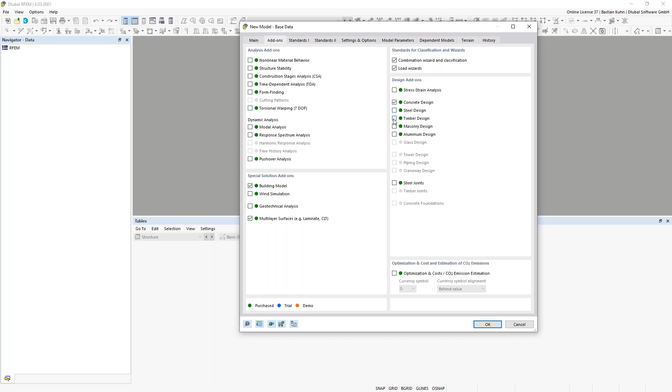For this, I will define a new model with the add-ons we will need today: the building model and the multi-layer surface. We will have a hybrid building made from concrete and timber, so I'm also activating concrete and timber design. Paul will do the design process afterwards, so this is just for completeness, or we can actually stay with that. We have the standards available here for concrete and timber, and also the combination for this.

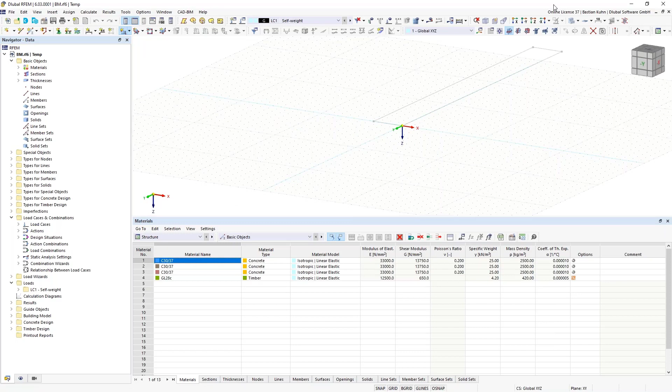First I will define the ceiling made from concrete, from the building that you just saw in the presentation from Andreas. I will not define thickness, materials, and cross sections in detail, as there are other webinars dealing with this. First I'm using a surface 30 centimeters thick with C30/37 concrete material, in the XY area with the dimension of 9 by 20 meters.

Then for my pillars, or the columns in the structure, I will divide the line here for arranging them by 2, and copy this for the other columns in the X direction 4 times by 4 meters. That was wrong, sorry - I had to press the control button, otherwise it will not work. I'll repeat this step, and now it looks better.

I will do the stiffening of the structure with a so-called concrete kernel, arranged from these nodes highlighted here, so I will delete the two nodes in the front. The first story should have a height of 3 meters.

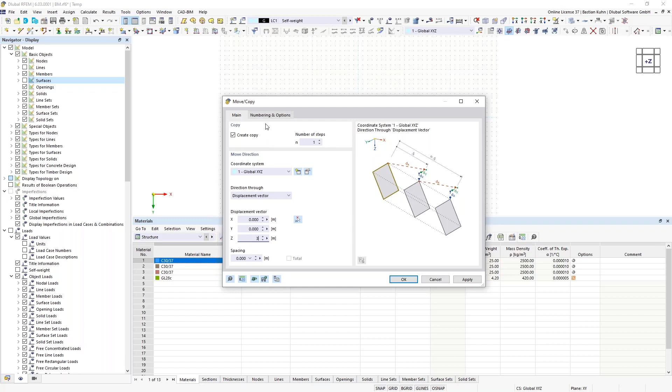I'm defining this 3 meters here, and I will switch off the surface and lines from displaying, and copy those existing nodes once, also 3 meters, but automatically arrange the columns in between. Therefore I'm activating step links here and defining the cross section.

The section will have the dimension 40 by 40 centimeters and the same material as the first floor ceiling, but it's a new material - oh, I forgot the reinforcement, sorry, happened to me twice now. So I go into the material database, and now I'm choosing reinforcing steel.

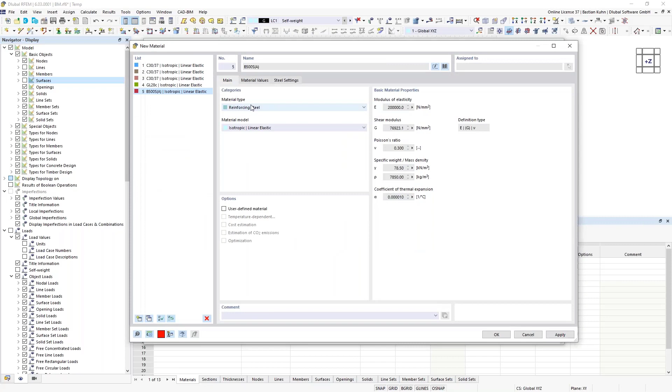Again, that's only for the design process, so not so essential now for the things that I want to show you in the first point, but it's important for the points that Paul will show you.

Okay, now I can put the members and surfaces back again. In this area, that's what I told you, where I want to have the concrete kernel. I'm arranging this, and it should have the same thickness as the ceiling, but with a new material, so I have 3 materials already consisting of the same grade. It just makes life a little bit easier afterwards. So here is the concrete kernel, and that's actually how the majority of the stories should look like.

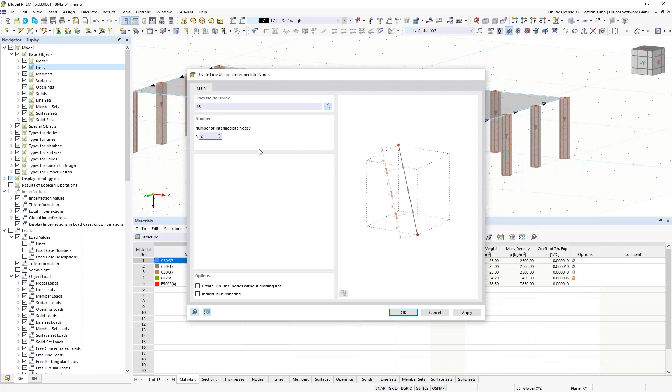I want to have an opening at this point, therefore I'm dividing this line by 2 intermediate nodes, giving the first one an X coordinate of 9 meters and the second one an X coordinate of 11 meters, so I have quite a wide opening of 2 meters, which should be enough.

That I will also copy by an amount of minus 2.5 meters, and I will not copy anything inside that, so just a node, and define the opening in here. All right, okay, so now that's done.

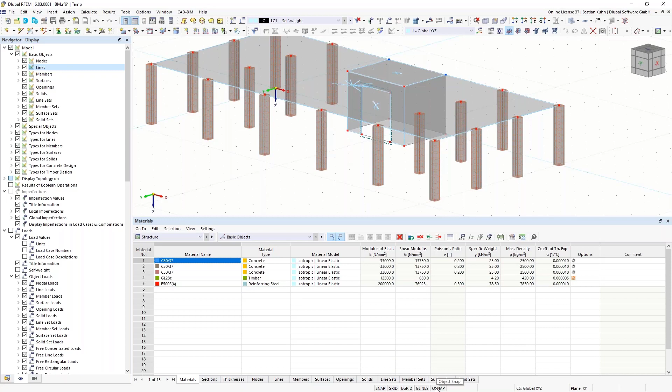You probably saw that some kind of cells are generated here. That is something already needed for the building model add-on afterwards. In order to arrange the cells correctly on the opening, I need to divide this surface. Let me check the number - the surface number 5 - by vertical lines completely.

And now I could copy the node, of course, just 50 centimeters above, but there's an easier function to use - the object snap with perpendicular inside here. Once I activate that, it's generating the line perpendicular to the existing one, and that fits, so it just goes a little bit quicker.

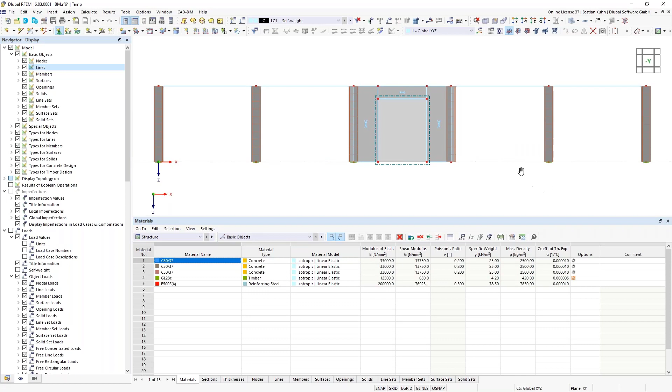All right, so we need supports - that's what is missing right now. The bottom columns are from concrete, and therefore I can also clamp the supports. Okay, we can arrange it maybe this way and this way, whatever. So we need to delete those - those are not sensible in here. Maybe they are a little bit small, so I can use the slider to increase the size a little bit.

And now in the concrete kernel, I will also define line supports for the walls. They will be arranged locally with a fixed movement in X and Z direction, so they can only bear force in the horizontal direction of the wall and in the vertical direction of the wall.

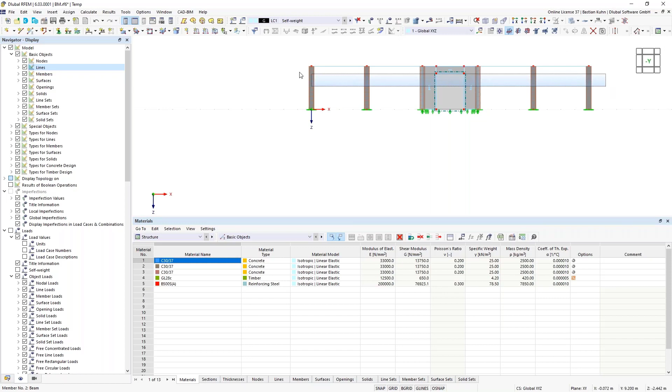Okay, so that is the first story, and it's good to go, I'd say. And then we will copy this one 4 times, again 4 times, by an amount of minus 3 meters. Then the building is already there.

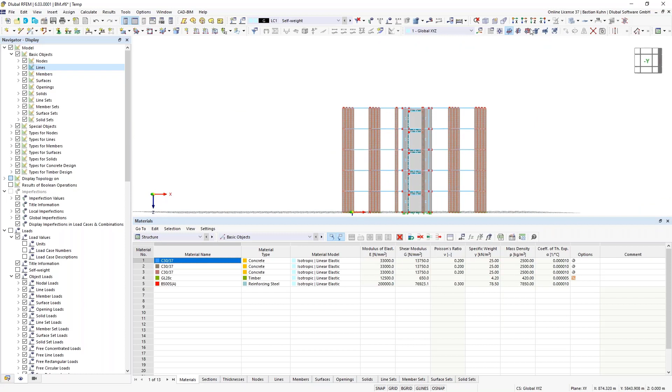But we miss one story. And I want to show you that with this add-on, we are able to calculate also unsymmetric ground floor plans. So therefore, I'm defining the top story with a slightly different height. Let's say we want to be very economic, and therefore we just say the top 2 stories should have a height of 2.75 meters, which will be round about this, but minus makes more sense. So, all right, okay, so yeah, it's quite narrow here, but it's still enough, I would say.

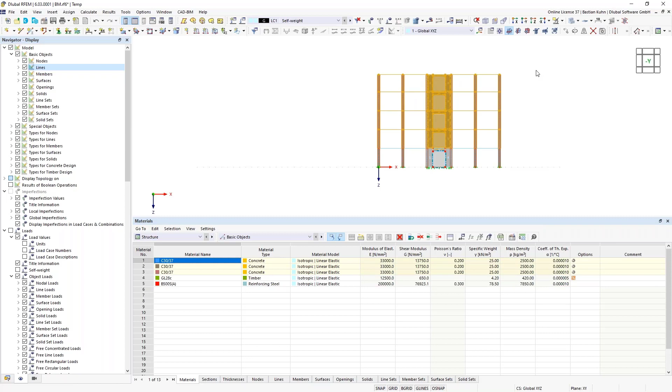I also said that we want a hybrid building, therefore the columns in the other stories should be made from timber, except those 2 ones in the back.

So we will change them now by members, edit, and give them a new section here - a section of 22 centimeters by 22 centimeters. And of course, oops, that was wrong, sorry - a timber material. Therefore, we go into the material database.

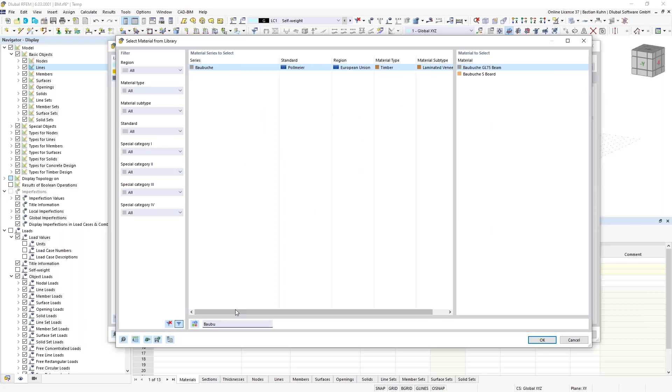Now you have that there. And I'm choosing a quite interesting product called Baubuche, which is perfect for designing columns in higher buildings, as it is light, but can keep the same or nearly the same amount of pressure that concrete can bear. So that's something perfect to be used for high-rise buildings together with timber.

Okay, the design types, configurations, and so on, that will be shown to you by Paul for the concrete, and it's the same for concrete, steel, and timber anyway, so we do not have to go too much into detail. The only thing I can say now is that for the design types, we are assigning a service class 1 for the columns, as they are covered, or they are all inside the building. That's why we are using it this way.

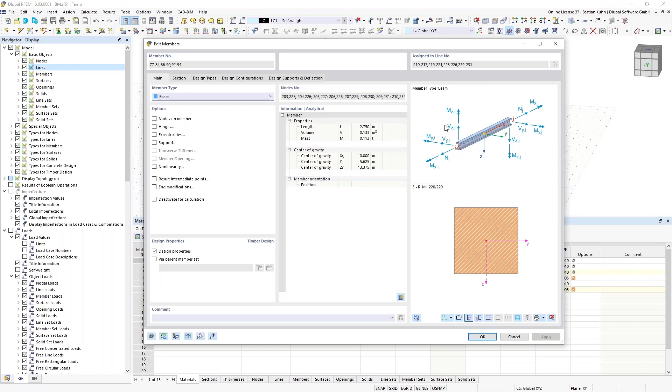Okay, this, and then these columns here, they should have hinges. I'm explaining afterwards why I only assign hinges in those stories, after I have assigned or defined the building model data of it. All right, so that's UX, and we do the same for top and bottom.

All right, so that's here. We also want the top floor to be a little bit different. Therefore, we will delete this and now define cross-laminated timber for the top two stories of the structure. We define a new thickness.

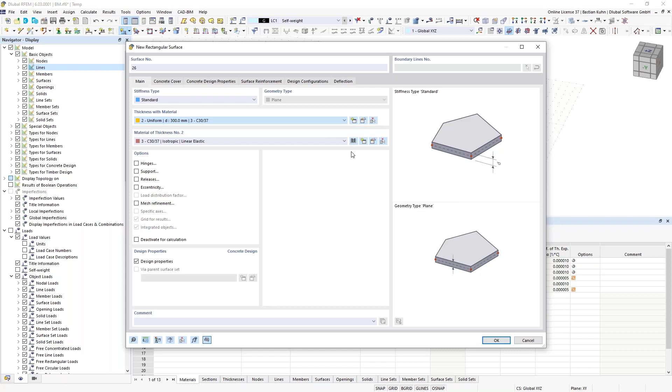As I had activated the multi-layer add-on, the thickness type layers is available here. There's another webinar dealing with this, probably Andreas will show that to you afterwards. Just as basic information, you can define several layers of material here.

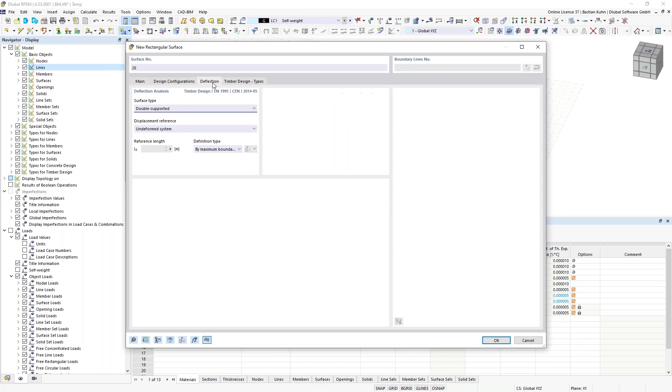To keep it simple, I'm just choosing a material from the database, but user-defined definition is also possible. There are factors you can see here that are also explained in these other points. That's the same as what I already showed for the beams.

So then where do we want to have our surface in here? From this column here to this, and also from this to this. All right, and we do the same in here. On the other side, we could have also mirrored it, then it would have been even quicker for modeling it.

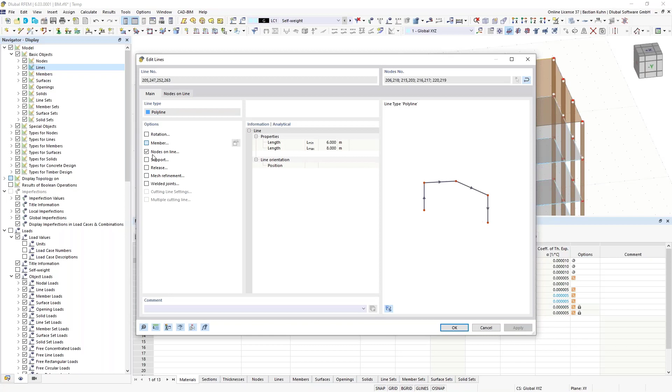Now we have quite a bigger overhang here, and we have also no stiffness in here. What do we do there? Well, for sure, we will need some beam there. That's going to be a new member, and also a new section.

We will choose the section 18 centimeters by 22 made from glulam. All right, member, and then we have it in here. There's something that has not been divided correctly. I will do so now. Yeah, looks good.

Okay, there was something that looks strange to me. So I forgot to assign there also the moment hinges. I can add that quickly by just selecting here the hinges and choose the same ones as for the columns. And for sure, those have to be eccentric.

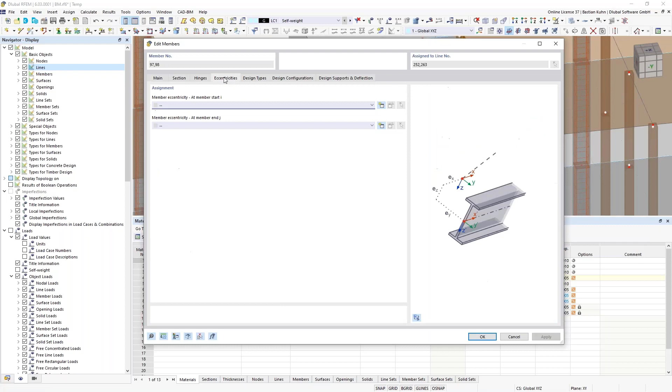That can also be added here. So eccentricity, and we will have it underneath with an offset to the existing surface, and it's going to be this one. All right, oh that was too quick. We need it also on both sides of the member. Okay, that looks good.

Now, when you have a downstand beam under a ceiling, and also here the CLT plate should be connected with some kind of slip or degree of freedom, as a moment stiff rotation is not possible for timber in here.

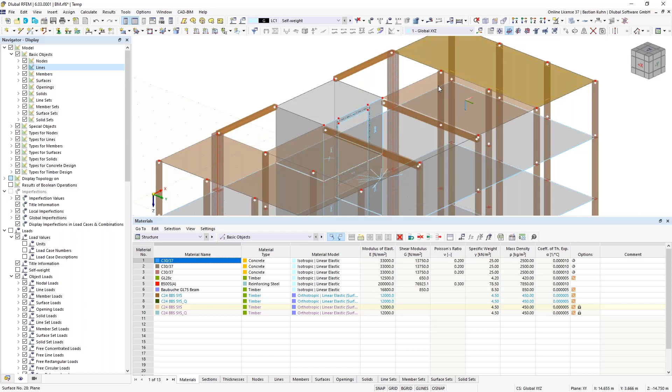Therefore, we will insert type for lines, line hinges dialog box. I'm once again not explaining that in detail, but there should also be a slip in UX direction, but we will skip that and just use the moment-free rotation today.

On this surface, okay, I hope I got them all. We can take a look. It's a little bit small in the displaying, but we can use the slider again to make that bigger. Looks good. So we have defined some degree of freedom in here.

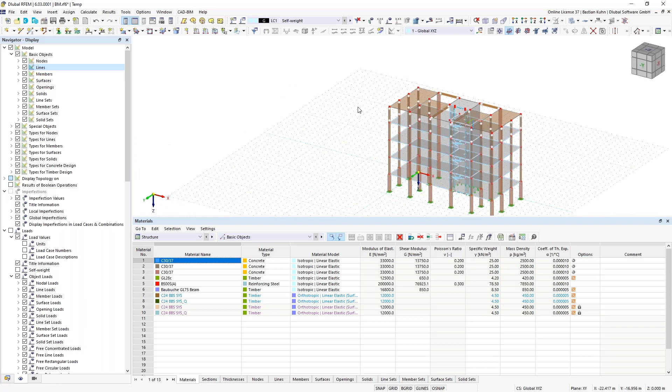Okay, that is it. But we need also the last story of this. Therefore, this one here we can delete, and we will copy this just by a value of 1 in z direction, minus 2.75 meter. All right.

And in here, we don't, just to have it quite unsymmetric, we have that in here. All right, okay, here is open. Maybe we can also add a little concrete cover there on top. Therefore, we choose the first material. Okay, so that looks better.

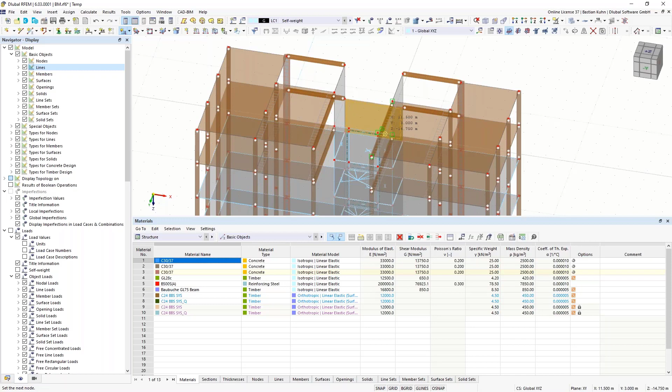Go into the rendering, and now I think everybody can understand how this building is supposed to work. Okay, loading, we need to assign.

But before we do that, we define all the load cases. So we have the live load, and then we have snow below 1,000 meters, and we also will define wind just to have something.

Now the first load case should have, just let me take a look at my documents, should have an amount of 2 kilonewtons per square meter. So I'm choosing this here. I only have to do that for the first load case. For the second, I can actually copy those from here. So apply and next, and you see it in the back. There it is. And then we do the same for the second load case with another value.

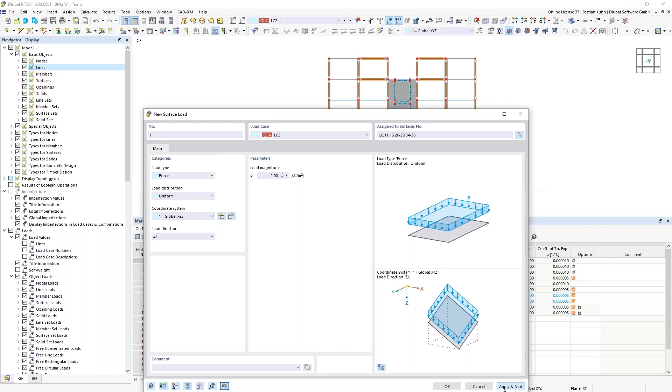Apply and next. And now for the snow, we just pick the roof. Oh, and a different value of 0.85.

Okay, that's the load. We will also use the load wizard for the wind load. We have the same for the snow load, but we simplified it a little bit here.

We can choose the base corners for the wind load, and now also the roof.

Okay, we will just assign the wind load on front of the building, just on the weak side. So that should actually be the design giving value in here. We are choosing category 0, does not really matter too much, and let the wind load generator generate the wind load on it. So if we move to load case 4, you can see that horizontal load is assigned onto the building.

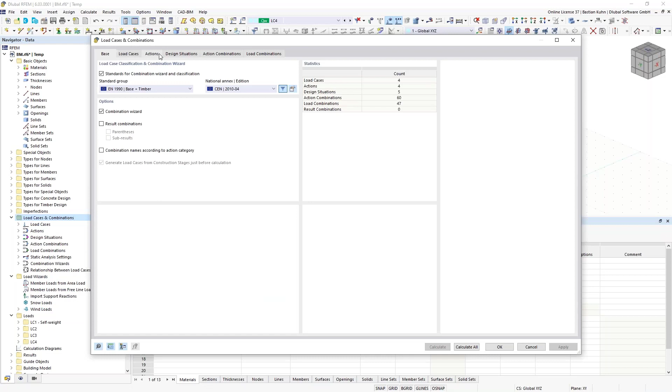Okay, so I forgot load cases and combinations. We can keep a small eye on this. Design situation, I'm just designing ultimate limit state, according the first order theory, and let the program calculate my combinations.

And now if we look, for example, for the combination 12 and the results, what we have in combination 12, you see there's a one-time calculation done for this building.

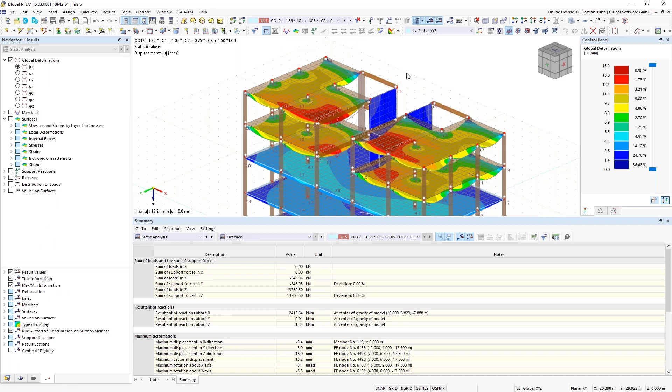And now without the building model add-on, it's possible for sure, because we also do that in a lot of other webinars to design it. But you see that you have now mixed the inner forces of the walls.

Let's say we go for internal forces, moment X. So you have the ceilings in here and also the walls, and you have mixed that all, and you have no clear way to separate between walls and ceilings in here, and that is now something where the building model add-on can help you.

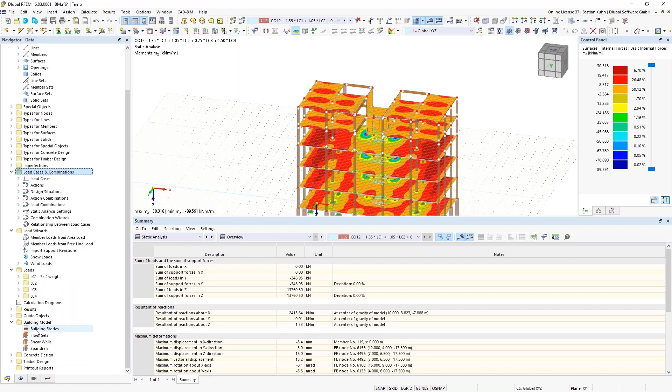Therefore, as we have activated building model add-on, we will assign building stories. So we got inside in here and define new building stories.

There are several ways to generate also stories in here, but the usual way probably is to design a building and then assign the stories to it, and that's what I'm showing you here today. The other ways are all described in the manual.

Okay, first elevation is -3 meters. And now we can more or less automatically arrange all the other stories. You see now that the 5th floor has a different Z coordinate.

I need to pick it again in here, and yeah, then use the last floor more or less automatically. Okay, this I can do, or this I've done now.

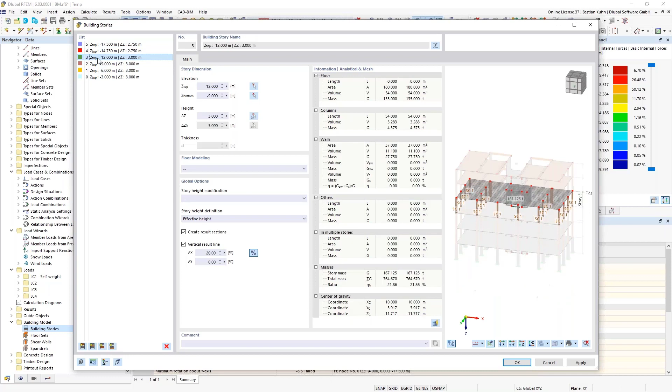And for the story 0 to 3, I'm choosing the floor modeling rigid diaphragm. There's also an object load transfer only, but I'm not explaining this today. Load transfer, just as a short explanation, is a kind of surface that is only distributing load.

If I should have done the load assigning correctly for the snow, there where you see the holes in here, maybe you already realized that, I should have assigned a load transfer surface, but yeah, for this webinar, I did not model it or use it today.

Okay, so for this stories you see in here, I'm assigning rigid diaphragm. And now when you press OK, it's deleting all the results. And now you see here a lot of red lines, I would say.

These are rigid couplings which go from, and you see a blue bubble in here. So the lightest one is on the top story to 28.59 something tons. And then, okay, concrete is the heavier material. It goes up the more down you go.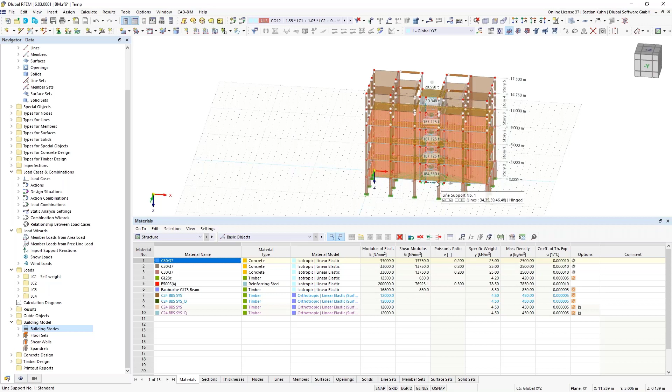And these red lines, or these rigid couplings, are centered in this mass center, and they are connected to each of the columns or each FE element in each story.

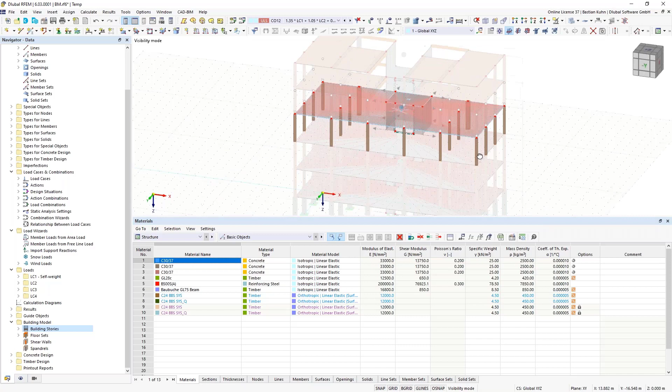Maybe we take just a look on one story. Therefore, we will use story 3, for example. Visibility by selected and related objects, it should give it to us. I think it's not nice. Hold on. Yeah, maybe we just use this one story here. Yeah, that's what I want. So you see they are centered all in here.

There are the surface cells. They are only on this smaller objects in here. And now each of this point is connected rigid with the center.

Not complete rigid, as the ends of this rigid have a moment hinge, and that's also the reason why I did not define moment hinges on the columns in here, as the ceiling itself is considered as a ceiling. It may sound a little bit stupid, but that's an important point.

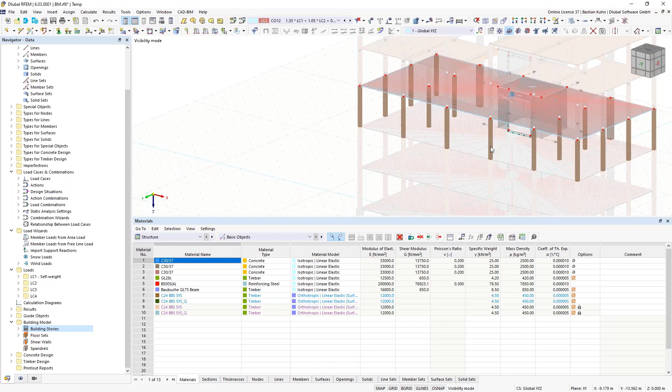Yeah, that's the first change what we have from this. Now, what else do we do with the building model add-on before we calculate the building?

We can define, if you look down here, floor sets. That's already done, as I had defined it in the building stories, but I can just take a quick look at this.

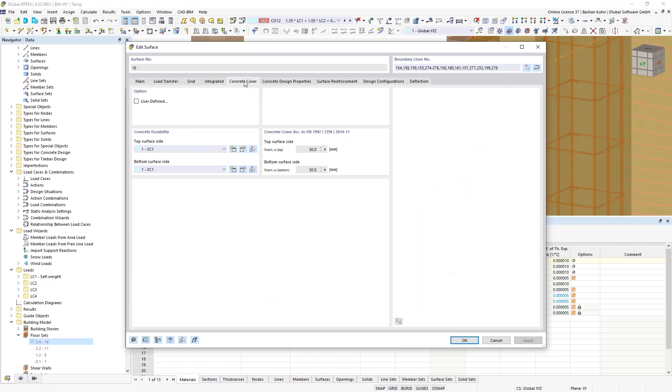There you see that each of the ceilings or the surface now has a floor set. If we double click onto the surface... oops, sorry, that was wrong, that's not what I wanted. I wanted to click on the surface here. Paul will show that to you afterwards for the concrete design, as this is the main point with it. But you see that originally there was a surface, a standard surface thickness type, and now it is overwritten by the building model add-on with floor slab rigid diaphragm.

So this is all organized here, and now we can define shear walls. Shear walls, I don't think I need to explain what shear walls are. They are in the concrete kernel in here.

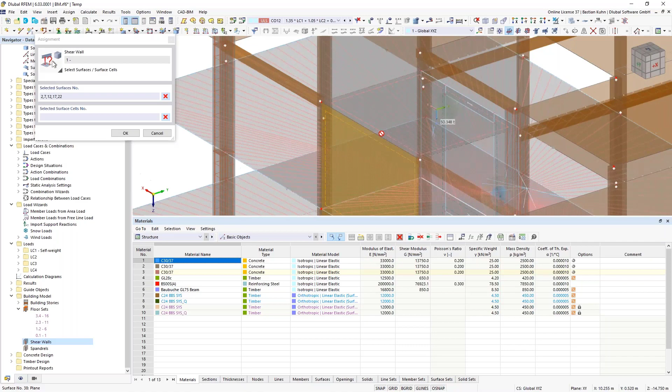So at first I'm using the one in the rear. Oops, come on. So there's none here, then you cannot pick it. All right.

Should have switched on the rendering, because now you can see what it's doing there. It's generating a section that goes from the first story to the fourth story. And I'm doing the same for the sides, as those buildings or those walls are going from the first to the fifth story. Choop and choop. All right. Okay.

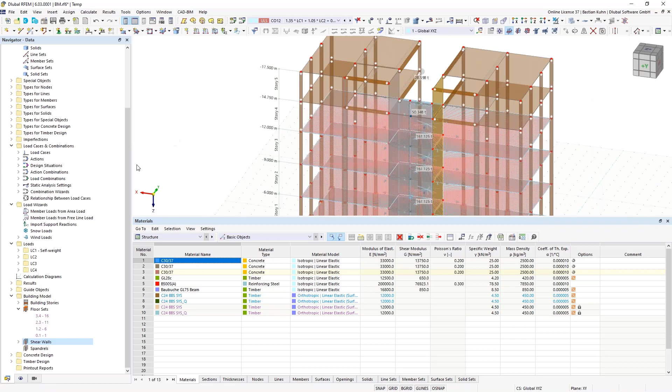And okay, then also the opposite side, I'm doing the same. Okay. Okay. Oops, all right, okay. Yeah, once again, okay, okay. And maybe I can switch off the rigid links, just looks a little bit better in my opinion.

Okay, now that's all assigned. It's automatically generated result beams that Paul will design.

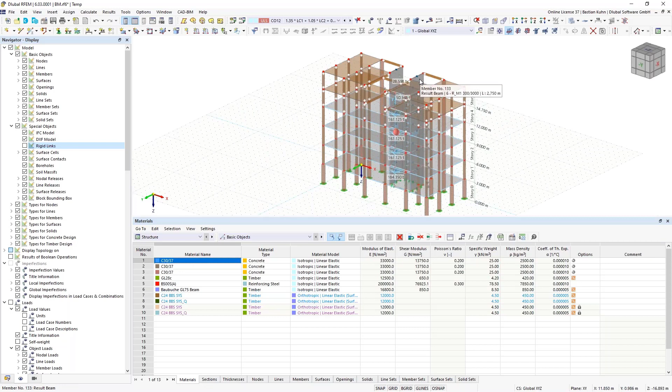And now when we calculate the design situation 1, so we press calculation in here, and if you look for the calculation progress, here now the mesh is generated. But now you see combination 1.

First entry is combination 1 static analysis. Second is combination 1 floor stiffness calculation. And third is rigidity. So every combination that we have, 13 by its number, is calculated now 3 times.

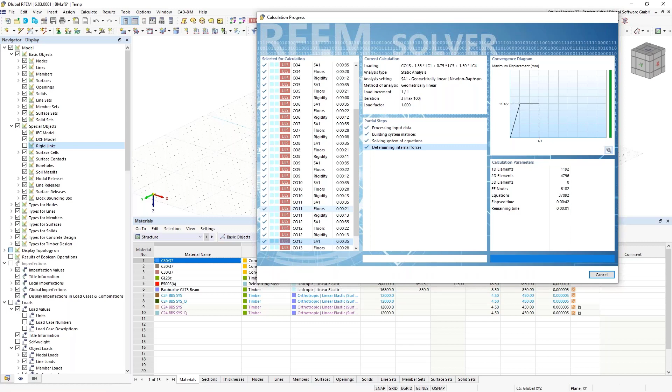What's the reason for this? The reason is that in the building model add-on, and we watched combination 12 before, there you saw that we only have static analysis. So we still have the original one, what you have without the building model, but we have 2 more calculations that it's doing. That's where the building model add-on helps you show or not show results, basically.

So if you look for the design situation, you see in a static analysis absolutely no difference to what we have before. The problematic thing I just mentioned when we looked at combination 12, it's all there. So there's not really a benefit of it.

But if you look for combination 12 again now, so we click on this here, you have a new entry, analysis of building stories. And now it's separated. You see the main point, which is more or less my shear walls or the shear wall design that I have in here.

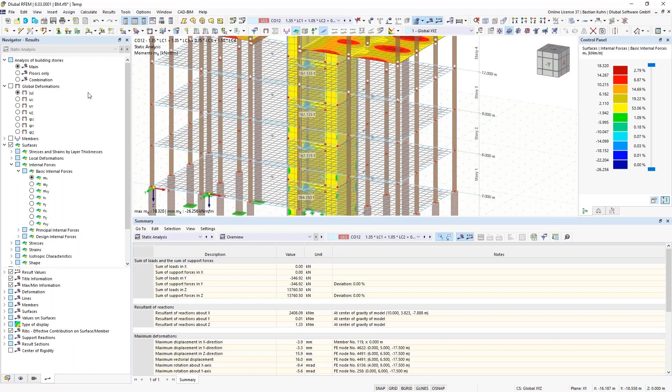And those can now be calculated, for example, in the timber design or in the concrete design add-on. The second one is the floors only. So you see, even though this floor stiffness is overwritten by rigid diaphragm, you still have a vertical bending, which you would not have with only rigid diaphragm. So in the vertical direction, we are using the stiffness of the usual surface.

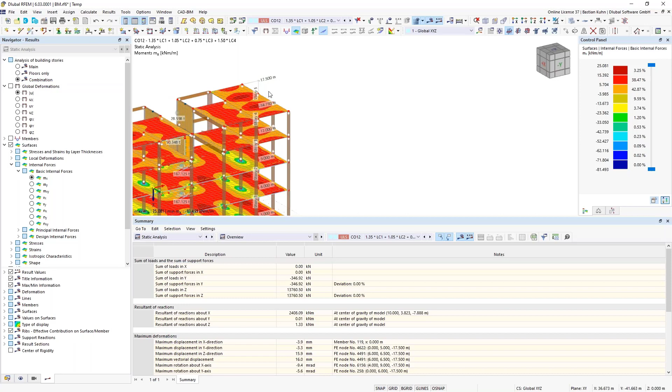So for horizontal, we are using the deformation for the stiffness of the structure in horizontal direction, we are using the rigid diaphragm stiffness, but for vertical the original stiffness is used. That's why these 3 design rows, I don't know if that's the right word, or times are done in here.

Okay, and the combination, that's then still again the original point what we have. I explained the following in the previous webinar of the building model, but just to have mentioned all the options from the building model, I also want to show you the results by stories here in the static analysis.

You see, you have a location of a resultant story force. You have the story forces, and you see we only have assigned horizontal force in Y direction. That's why we only have story forces in Y direction. Well, the difference between the interstory drift is the same, for the same reason, because I assigned the load only in this one direction.

And additionally to the center of mass in here, yeah, that's where I look for it, we also have a center of rigidity. Let me take a look. It should be, it should actually be in here. Wait, we can just switch off this result.

And maybe we can not display... where is the building model? There. The center of gravity, and my center, it should be a little bit different in here. Description. I had found it before, but not yet. I have to look for it. Surface cells, surface releases. No, not yet. But you can display it. Display topology. Oh, elevation mass. No, I apologize. I will give the word to Paul and take a look where it is, and then hopefully when he has finished his presentation, you can, or maybe he already knows and can show it. Otherwise, I will show that to you after he has done his presentation.

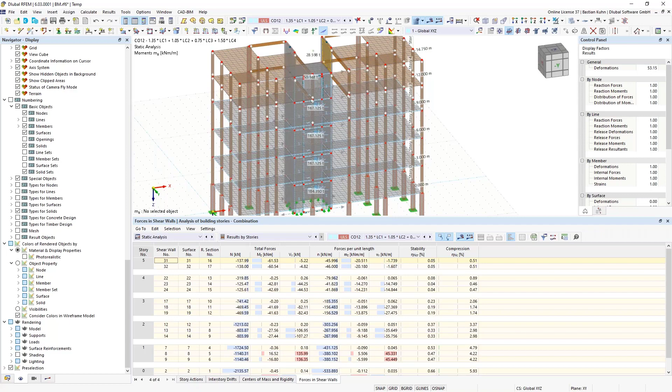Thanks, Bastian. So you can hand over the screen to me. All right. Okay, so you should now see my screen, I guess. Just check it. Yes, perfect.

So Bastian has modeled the structure and has also done the entries in the building model. And now I will continue with the design in the concrete design add-on.

Before I start with that, I will just say some words about the changes on my file compared to the last state of Bastian. I have just added some combinations here with characteristic design situations and quasi-permanent design situation, just for being able to perform the serviceability limit state design checks in the concrete design add-on. So that is a change compared to Bastian's latest state. And I have also assigned here some

mesh refinements, nodal mesh refinements, and surface result adjustments. But those are basic functions from RFEM 6, so I will not deal with that today. I will directly concentrate on the features of the building model and the combination with the concrete design add-on.

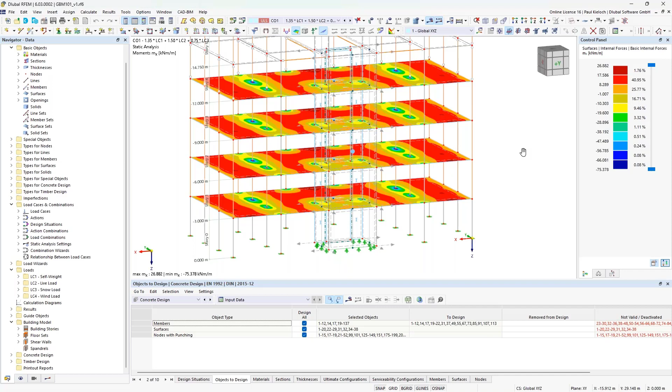So I would like to start with the shear walls at first. At first I will explain to you the context of designing shear walls in the concrete design add-on that were generated by the building model add-on. Bastian has entered here these shear walls on this exterior wall here, and he has just selected, for example, one surface.

If I would, or like he has done, just select one surface, then the program would generate us a rectangular section, like in this case, and it will automatically create a member type result beam. In the current development state, we are able in the concrete design add-on to design this section, so to enter the reinforcement for this rectangle section, and then afterwards to perform the design checks.

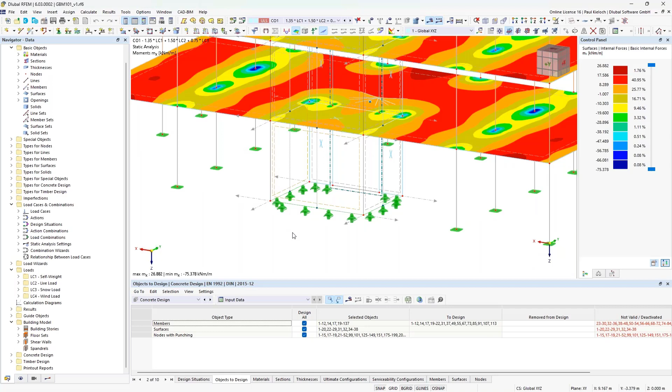Of course, you may ask yourself, why haven't we selected also the combination of this wall and this wall? So maybe you would expect a shear wall with a member with a section of C shape or L shape, like I would have selected just these two surfaces. That will be possible in the future. But in this case, if you would assign, let's say, these three walls, the program would generate a section with a C shape, and then it would not be a rectangle section like in this case, but it would be a C shape R section.

So then you would get here the wording R section, and what we are still developing is an interface of RFEM 6 and our cross-section program R-SECTION. In the future, it will be possible also to reinforce such cross sections with an L shape, T shape, or a C shape in R-SECTION, define the reinforcement there, and then import it back to RFEM 6 and do the design here in the concrete design add-on. But this interface between the two programs is not ready yet.

That's why we have selected for the shear walls just one surface, and we are running the analysis now with regular rectangle cross sections. Just to give you background why we have selected just the individual surfaces here today.

When I want to start the design process of these shear walls, then I can basically select them just with clicked or pressed Control key. Open them, and like I said before, we are getting a result beam here with this rectangle cross section, and like for every other beam that you already know from RFEM 6, you can activate here these design properties.

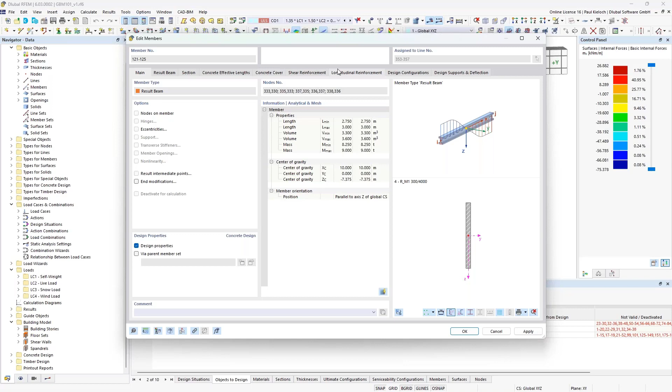If these design properties were activated, then you get here the tabs for the concrete design add-on, like, for example, the concrete effective length, the concrete covering settings, and of course shear reinforcement and longitudinal reinforcement. So in my today's example, I would like to apply a shear reinforcement with a diameter of 10 millimeters and a spacing of 15 centimeters. The program automatically adjusts here the rendering of this member. Then I can click on apply.

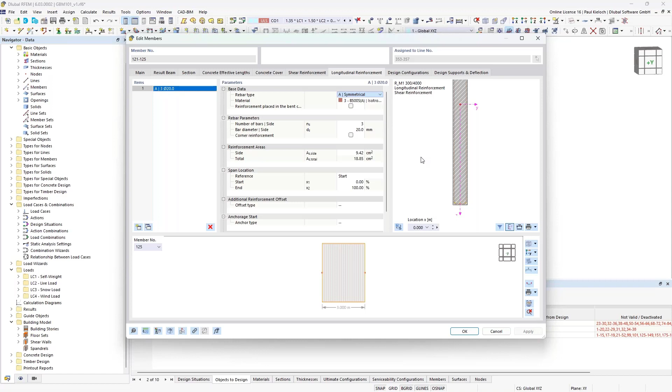And then I'm switching over here to this next tab, longitudinal reinforcement. And there I will switch the rebar type to type D line. And with this type, I would like to apply here a reinforcement on the outer lines of this section.

And therefore I will apply 26 rebars, a number of bars 26. In this example I'm using a diameter of 12 millimeters. And now with the settings, I have to define on which line of this section these 26 bars should be applied on. So I will use here from left top side to the left bottom side.

Okay, then you see here already on this left side of this section these 26 bars. And what I also will apply here is the offset. I would not use 40 millimeters here, but 20 in this example, just to show you how you can work with this dialog here. Then I click on apply.

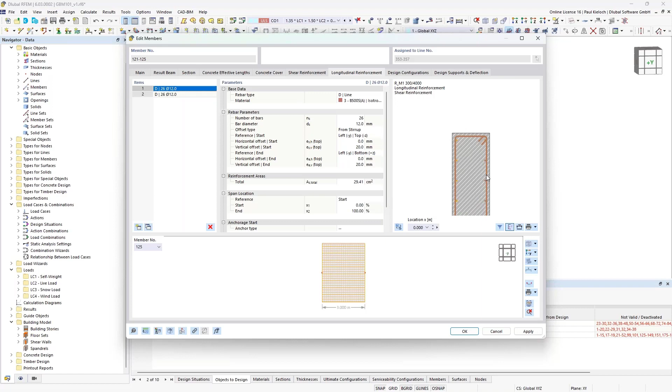And now I want to copy this item to the other side. Therefore I'm just selecting it here, clicking on copy. And then I'm selecting this second item. And I now have just to switch the reference from the start point. Now it's the right top side. And then on the bottom, it's the right bottom side. And then it looks like this. I click on apply.

And now you see here this reinforcement over the height of 4 meters here for this section.

Now I would like to show you a new feature which you will get in the next version, next week. So I'm working now in an internal version, and I would like to give you here a short demonstration about a new reinforcement type. It is called cross ties. Starting with next week, in the new version, you can assign cross ties to all of your cross sections. I will show it first here for this, let's call it wall section.

So if you activate this cross ties here, the program will generate these rebars from one free rebar to another. And you can now, with this activated, also deactivate these cross ties that you do not need in your section. So for example, you can go through here and just define that you don't want to apply this cross tie on every rebar here. So you can just click in here.

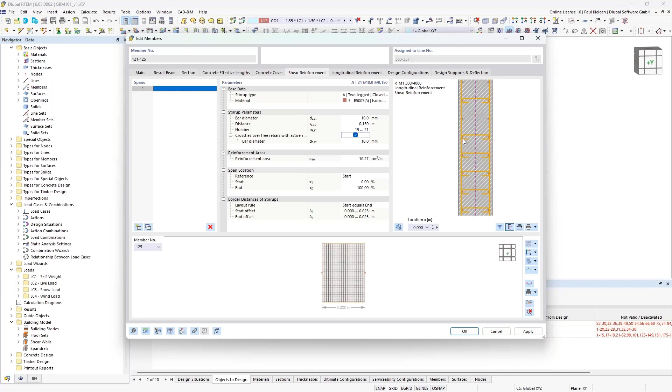It's a little bit of clicking, I think, for this height of the section, but I decided to do it also for this section just to give you a demonstration how it works. And as I said before, it will be available starting next week with the new customer release. So let's do it in this way. Click on apply.

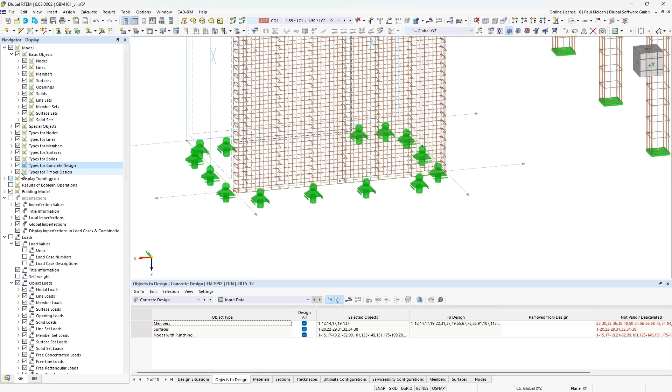And then I have defined the reinforcement here, including this new type, cross ties. If I click on OK, I can control the settings also in the rendering. So therefore I will switch to the display navigator and just click here on types for concrete design. And then you would see here this reinforcement for this member, including these new cross ties. I will switch this off just because maybe it looks a little bit too confusing if I let it activated.

So those are my members for the shear walls. I will afterwards do the calculation only for the new object. So I'm deactivating here the checks for design all, and now I'm selecting just the objects with new features here in context of the building model add-on. So those are our shear walls here. That is okay for the first step.

If I'm switching back to the data navigator, then we have here now the shear walls defined. And what you can see here now is a new type, spandrels. And with this type spandrels, or object, you can basically define spandrels or generate spandrels, or also deep beams.

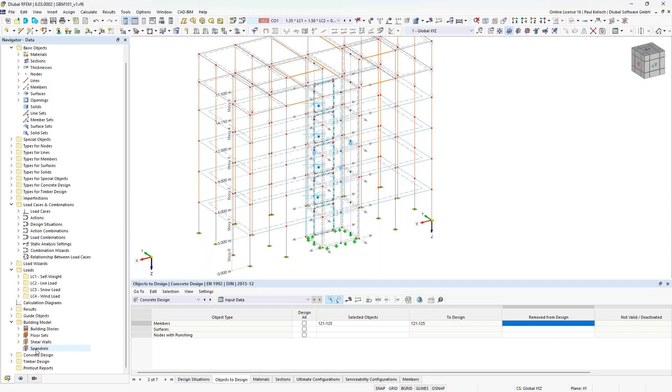We can use for the spandrels the regular surfaces, or like Bastian has generated before, the surface cells. So these are the cells with the blue, light blue border lines here. Therefore, I'm clicking here and creating a new spandrel, and you see here the options.

You can select either a surface or a surface cell for creating a spandrel, and while creating the spandrel, the program will once again create a result beam and automatically create the correct cross section for this result beam, and also assign the correct surfaces to the result beam. So if you're using the building model add-on, the former process, which you maybe also know from RFEM 5, to create a result beam, create a section for the result beam, and assign everything manually, can now be done automatically by using the features in the building model add-on.

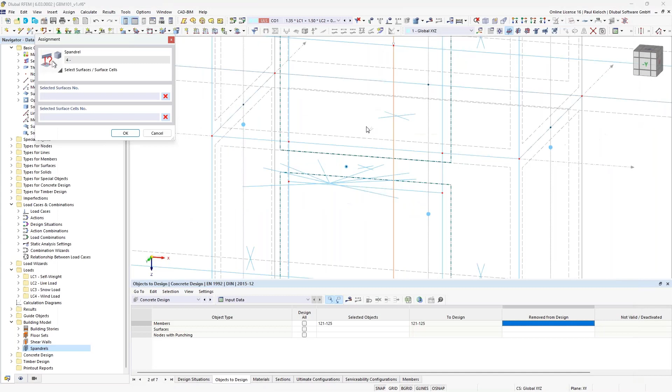So I can select a cell. I'm starting here with this one and clicking on apply, and then you see the program has automatically created a section for our result beam. I can just continue, create a new spandrel, selecting the next cell, clicking OK, then the next one. Just zoom in to find the right cell, 19, then the next one, okay, and the last one is this one here. Okay.

I have done this now for these horizontal cells here. So I've generated these result beams by clicking on the cell. Of course, like I said before, you can use the regular slabs to generate a deep beam by using this object spandrel, or you can also combine multiple cells by clicking multiple cells to generate a larger spandrel. But in today's example, I have just used the cells upon the openings.

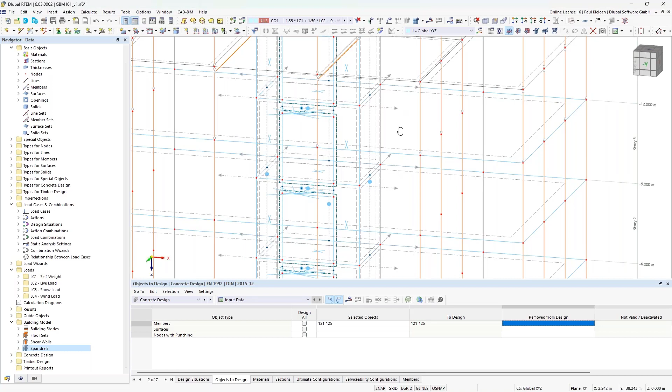So after the spandrels were generated, I will open the first one here. And as shown before for the shear walls, I can activate here the design properties for this object. Once again, I can change here the spacing of the shear reinforcement.

And if you now click maybe here, you can see how it looks like. And here we have once again our free rebars. So we can also activate here our new cross ties, but I will first switch to this longitudinal reinforcement and change the settings here.

I would like to use here uniform surrounding and 8 bars with a diameter of 12 millimeter. I click on apply, and now I have on each side one free bar where no stirrup was assigned to, so I can go back to shear reinforcement, and now I can also click here on cross ties over free rebars, and then it looks like this.

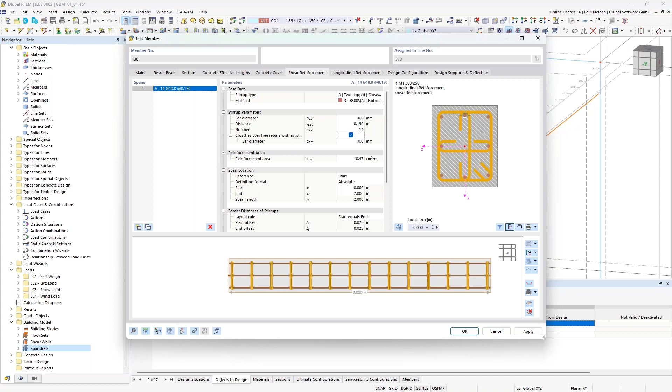And here now, if this option was activated, you can graphically activate and deactivate these shear links. And these stirrups or cross ties will be considered in the shear force design check and also in the detailing design checks.

Because we are considering these stirrups or cross ties also in the shear and detailing design checks, we have currently implemented this cross ties feature for the Eurocode, Eurocode 2, including the national annexes. If you would like to use this cross tie type for the American standard ACI or the Canadian standard CSA, you will have to wait a little bit. We will release this for the other standards also as soon as possible, but next week we will release it first for the Eurocode.

Okay, in my example today, I will not apply them for the calculation. I wanted just to show you this new option in context of this webinar. Okay, I'm clicking on OK now.

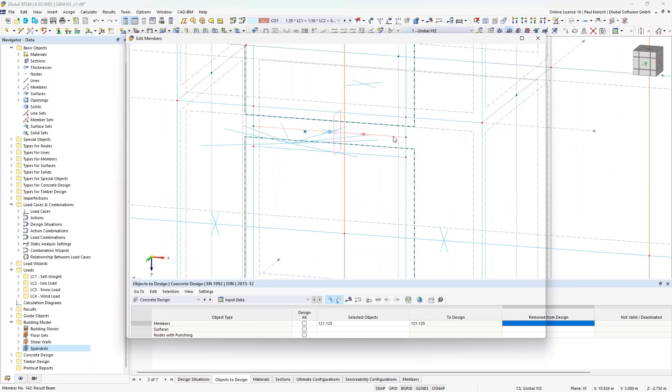And for the other members, we'll select them just by holding the Control key, doing a double click on the selected members, and then I activate once again the design properties. And now I can use this button here to overtake the settings from this member here.

And by doing so, we have these settings regarding the shear reinforcement already done, and also regarding the longitudinal reinforcement. I will just change the amount of longitudinal rebars to 10 rebars with a diameter of 12 millimeters. Okay, so I will apply this reinforcement for these spandrels here.

So we have now defined our shear walls that are basically result beams - I think in most cases vertical result beams - and here these spandrels, or let's say maybe you can also call them deep beams. It's up to you how you use this function. And I guess that these objects will be in most cases horizontal elements.

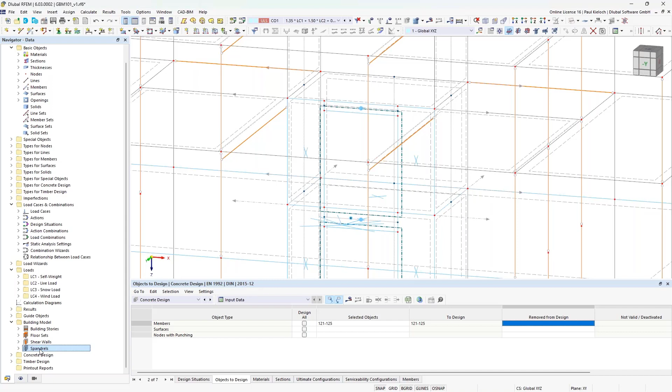So we have defined them, and I just have to select these members now to design in the add-on. Okay, confirm that with OK. And here I already have a check if no member number is shown as not valid or deactivated, then I can be sure that all settings were set up properly for the design in the add-on. So that is already a first check whether all settings are okay.

Then I will save this state and go over to the slabs.

Like Bastian already said before, if you activate the building model add-on, there is a new stiffness type for the slabs. The stiffness type is now called floor slab and rigid diaphragm. That means the calculation process is done in 2 steps.

For the floor slab, basically we perform a 2D calculation for the individual slab. The second step is the calculation as a rigid diaphragm. In this calculation process, the program transmits the horizontal loads on the exterior walls into the core of the building. So it's just load transmission, or transmission of horizontal loads.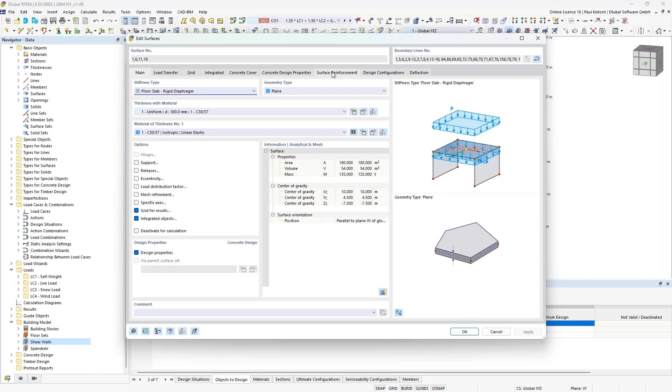For this 2D calculation of the floor slab, we have all these already known settings for the concrete design add-on, like concrete covering, concrete design properties with the reinforcement directions, and surface reinforcement. So now I can set up here for these 4 surfaces a mesh reinforcement, for example.

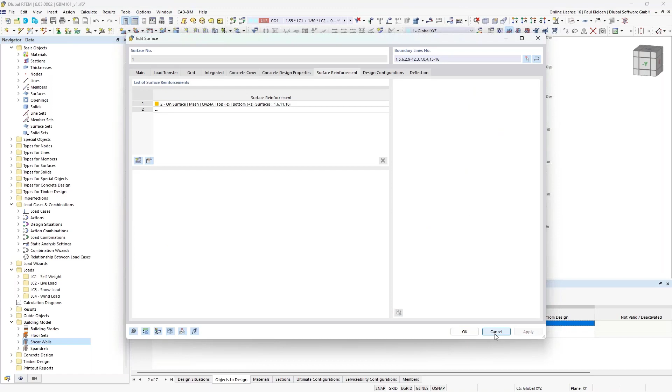I can switch the reinforcement type here to mesh, and in my example today I will use the German product range and use this mesh for the calculation. Click on OK, and on OK, and then it will be correctly applied here. I can select these surfaces for design in the add-on.

To show you the last feature for the building model today, I will also apply two surfaces here that are calculated in the standard approach, or standard stiffness. These two surfaces, just randomly picked, have the well-known stiffness type standard.

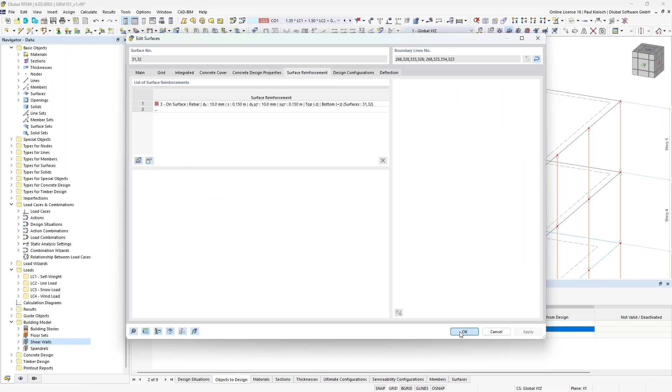I will assign a reinforcement here too, this time not by using a mesh but using just the regular rebars, confirming that and confirming that once again. Then I will select these two slabs also for the design. Okay, then I will save this.

With these settings, I think everything was set up correctly, so I can start the calculation now. The program will do the calculation for all of our load combinations in the same way as before, with this regular static analysis, the calculation of the 2D floor slabs, and rigidity to transmit the horizontal loads into the core of this building.

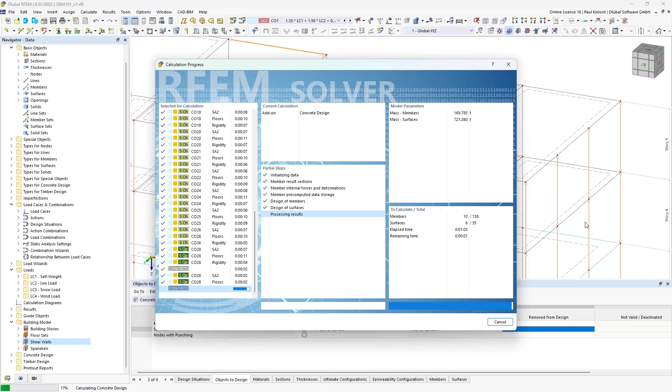I'm just waiting until the calculation is done, and then I will go over to the results and show you the results for these objects from the building model. I guess it will be ready in some seconds. Looks good till now. Maybe have a little bit to wait until the results will be displayed — that's also in combination with the app for this webinar today.

Now we have it. Okay, at first let's take a look at the design check details for the members. In general, if you use the objects from the building model add-on, you will get exactly the same results as for regular beams. The building model add-on generates result beams, and these result beams are used for the design checks in the concrete design add-on.

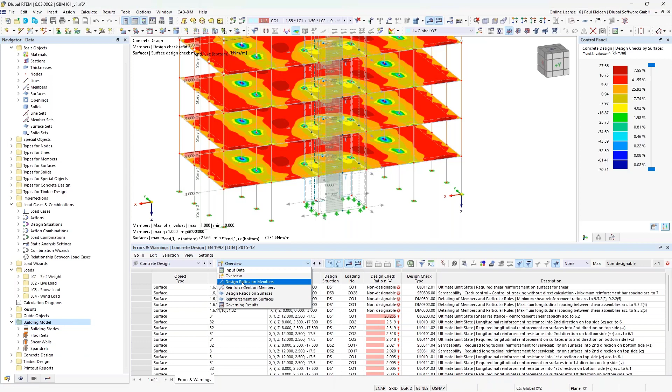If we switch over to design ratios on members, I'm clicking here and switching to the table design ratios on member, and selecting one member like this one here. Then you see that the program would do the design checks, especially for the detailing design checks, according to chapter 9.5. That means the program would recognize this member as a column. Currently the program is calculating these result beams like regular beams, and in this case it would recognize this object as a column.

If I click on a beam like this one here, then we have these design checks here, and there you see the detailing design checks according to chapter 9.2 — here we have the detailing design checks for a regular beam.

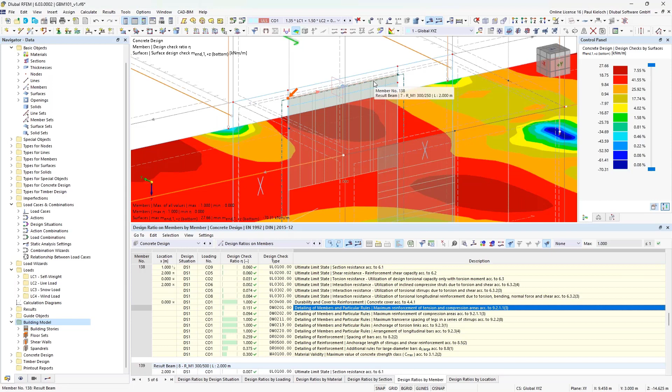That is currently some kind of intermediate state. We are planning to extend the possibilities for this add-on in the future. There will be an option to design also directly new object types, shear walls and spandrels or deep beams. If these member objects are separated into regular members and members for shear walls and spandrels, we will also implement the detailing design checks for deep beams and walls according to chapters 9.6 and 9.7 of the Eurocode. Currently it's not implemented, so the program does these design checks like for regular beams.

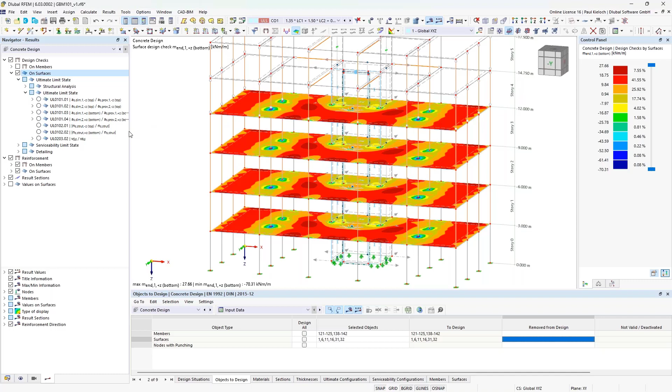One last change here in the concrete design add-on, if you are working with this floor slab rigid diaphragm stiffness type, is regarding the results. If we switch over and go to the design check on the surfaces, then in the first step it looks like always, so regular results. We have these design checks on the surfaces, and then, for example, ultimate limit state, and you can check the design checks for direction 1 on the bottom side. Maybe look like this.

And now if you open this little arrow, you get new results here. So this one is already known, that's basically the required or determined reinforcement. And now this is a new option here, coming directly from this calculation with the building model add-on.

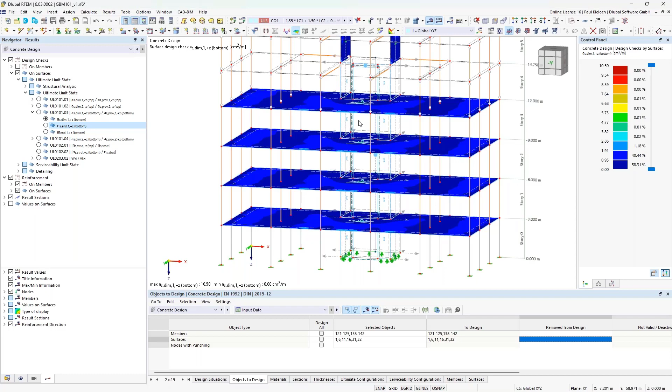So we now have here, inside a 3D object or 3D structure, a separation between design membrane forces and design moments. For these regular walls here, I've selected randomly these two slabs, and we have this regular design membrane forces, like you would design regular 3D objects.

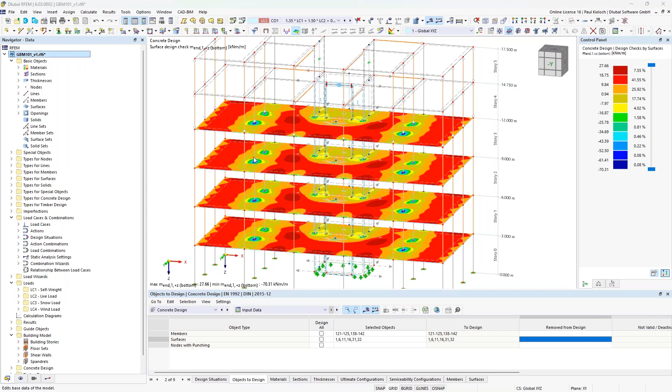This new setting in the context of a 3D file is the design moment. These design moments come from the approach that these slabs, with this stiffness type - floor slab rigid diaphragms - are now calculated like a 2D object inside a 3D structure. Basically it's the same as using the 2D plate model type, but inside a 3D building. That's the benefit of using the building model add-on: you can do the 2D calculation of individual slabs inside a 3D structure.

That's all from my point today. And now I think Bastian had one topic left. I think I can, but you don't have to hand over the screen to me.

You just, if you may, activate the static analysis in the navigator results, we can do it together. I just found it, yeah, I looked at the wrong spot, and just changed from design situation to any kind of load combination.

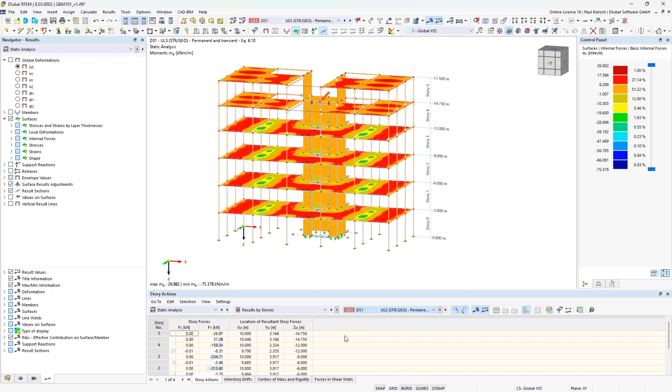Oh. Then you see it on the bottom there in the navigator. It's center of rigidity, on the bottom. Here it is, there it is. That's what? That's it, and then what?

If you just, there you see the blue nodes, bubbles. Maybe if you switch off surfaces results, okay, then you don't see it. It's a part of the results. So you see here these light blue bubbles, I guess. Yes, there is, yeah, okay.

Okay, then this is also cleared up, and I can hand over the screen to Andreas, I think.